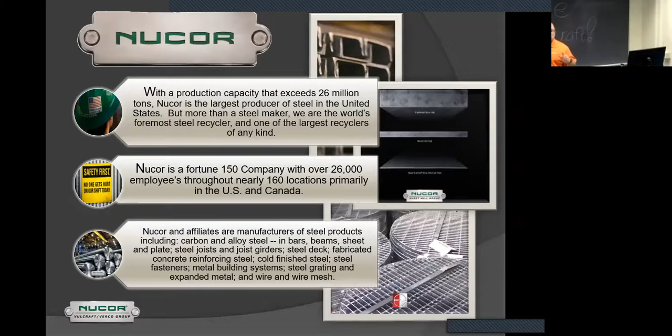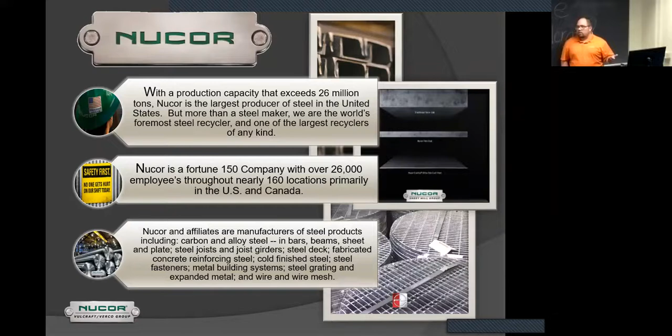And one of the neat things about being the largest steel producer in the United States, when they were trying to figure out how to do it more sustainably and have a better process, because steel companies in general have a bad rap, it gave them the opportunity to also be the largest recycler in the United States. So we're actually the largest recycler as well as the largest steel manufacturer in the United States.

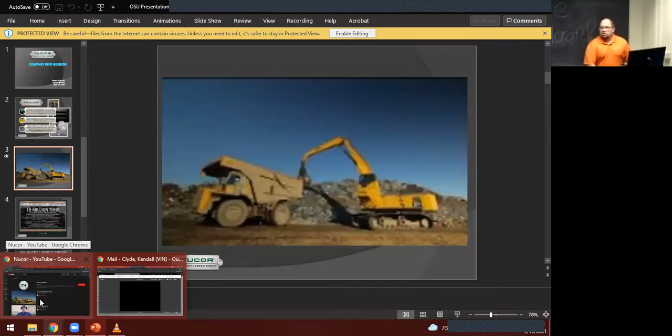So this is a video that doesn't work. So we're going to exit and I'm going to show it to you. But this kind of gives you a general history of Nucor, where they started. It's kind of neat, shows you some of the steel processes, how they make the steel. I promise it's not 12 minutes long. They have a bunch of dead space at the end of the video, as someone pointed out in the comments as I was watching this. Is that cool if I put the front lights on? Yeah, does it work like that?

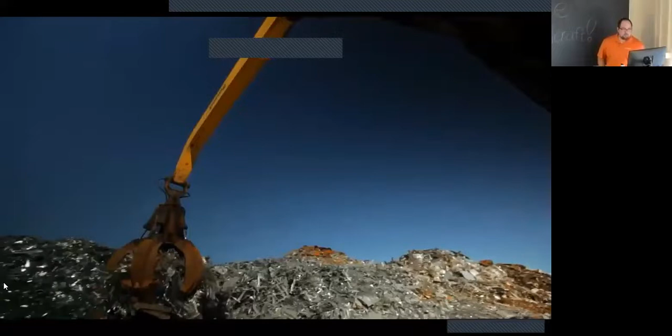It starts here. And ends up here. It starts here. And ends up here.

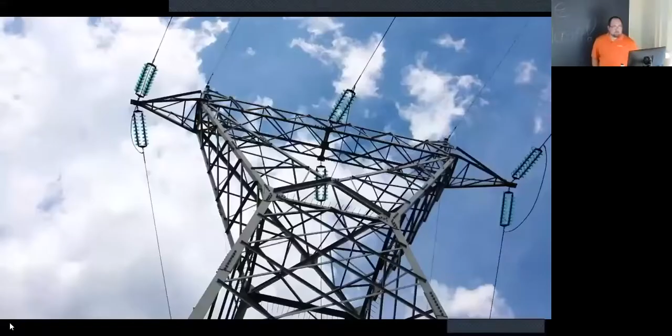Steel. It is everywhere in our modern world, providing strength today and ensuring an even stronger tomorrow. And it's made throughout the United States at Nucor's steel recycling facilities.

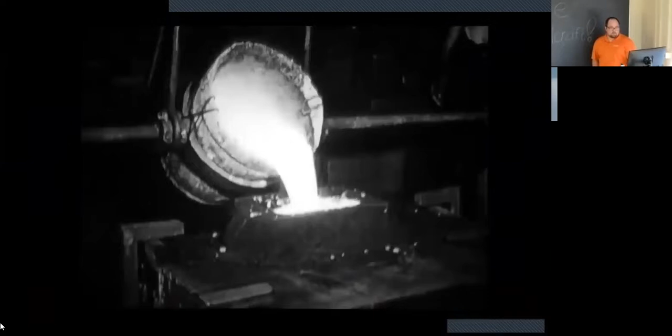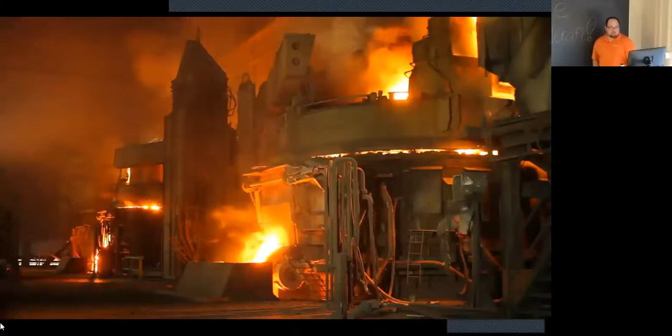Before the modern era, steel was primarily produced in blast furnaces that use iron ore, mined from the earth, as the primary feedstock. But starting in 1969, Nucor began producing steel using electric arc furnaces to melt down scrap steel and recycle it into new steel. This new generation of steel mill was called the mini mill.

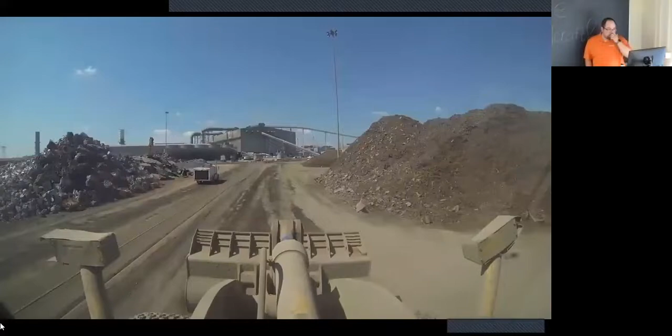No matter the process, making steel is about achieving proper chemistries, and Nucor pursued a more efficient way to achieve those chemistries by recycling the abundant scrap that was piling up in our nation's landfills.

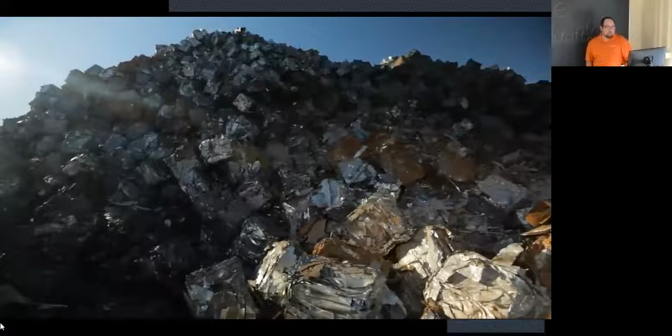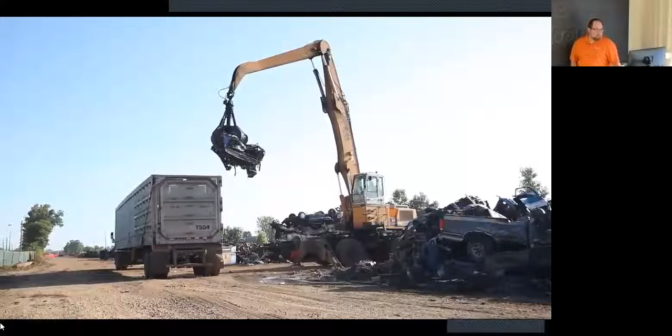Recycling steel using the mini mill model has allowed Nucor to become the largest steelmaker in North America, recycling more than 20 million tons of scrap per year into new products, the equivalent of recycling 24 cars every minute of every day. Our unique teammate-centric culture, combined with aggressive growth and strategic acquisitions, has propelled us from a single mini mill in rural South Carolina to the forefront of American steelmaking.

Our acquisition of the David J. Joseph Company, the nation's oldest and largest scrap processor, ensures that we are able to control our raw material supply. And greenfield projects like our direct reduced iron facility in Louisiana mean that we will continue to expand our product offerings and better serve our customers.

Nucor now operates more than 200 facilities across North America, offering a complete line of steel and steel products.

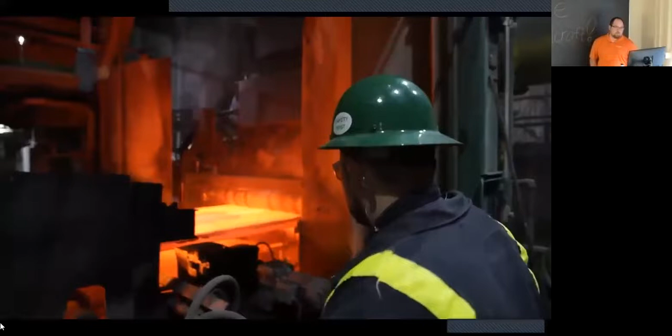Before making an ounce of steel, our more than 23,000 teammates start every shift with a safety meeting. Our motto is safety first, and it guides everything we do from start to finish. In the mill, our teammates are focused on taking care of our customers by producing and delivering top quality steel on time, every time. Here's how we do it.

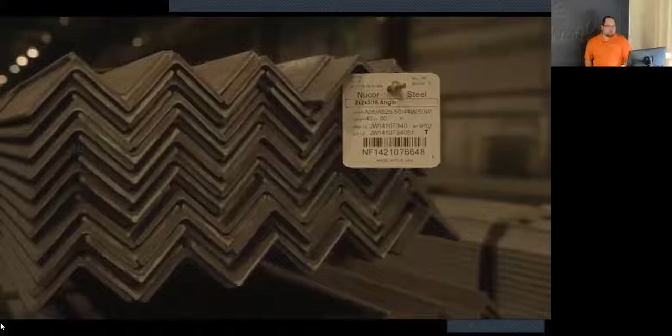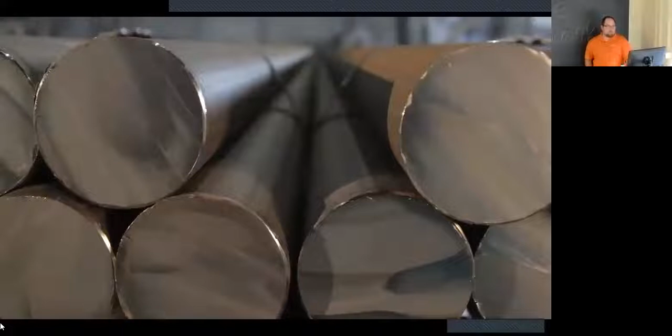Our advanced steel recycling process produces a variety of steel products, including bar, sheet, plate, and SBQ, but they all start in the same place, the scrapyard. In the scrapyard, we sort scrap for recycling. Because different types of scrap have different properties, we carefully combine our scrap so it will recycle into steel matching our customers' specifications.

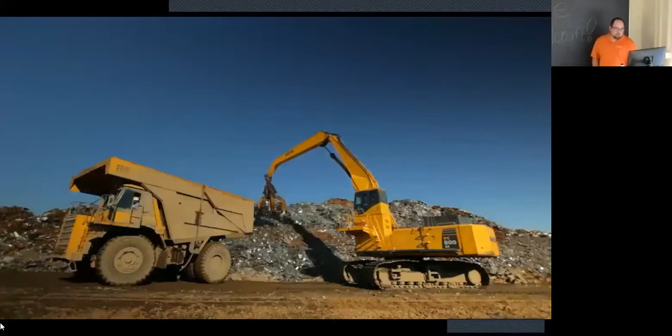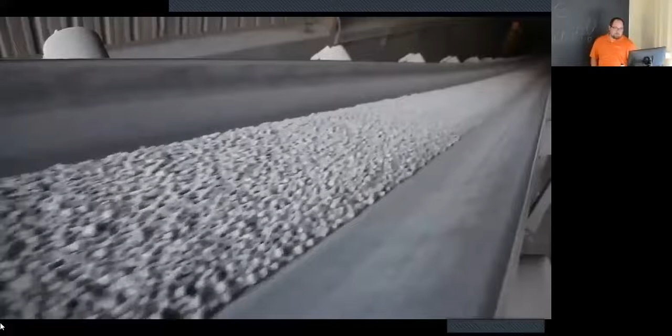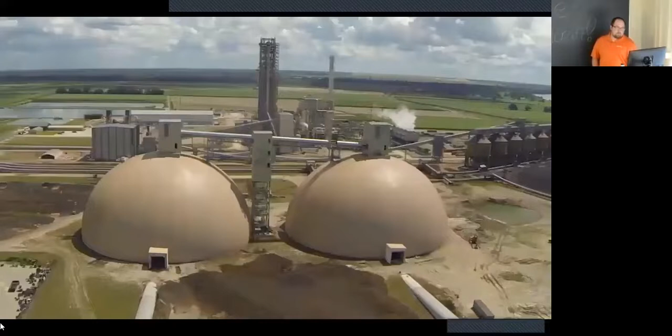Depending on a customer's specific needs, we sometimes combine our scrap with direct reduced iron, or DRI. Adding DRI allows us to produce more advanced steel products, including our high-strength, lightweight, and special bar quality products. And because our DRI is produced using natural gas, Nucor is making the most environmentally friendly steel on the market.

But recycling scrap is only part of Nucor's environmental stewardship. Our mills have extensive environmental programs for both their steelmaking process and the local environment, all designed to ensure that our process is clean and safe.

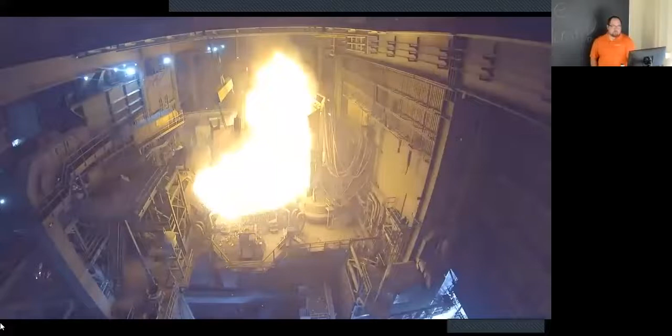Once sorted, our cranes drop the scrap into our EAF furnaces, which are the driving force behind our steelmaking process. The EAF uses electricity to melt the scrap down to 3,000 degree Fahrenheit molten steel. This process is significantly more energy efficient than traditional steel furnaces.

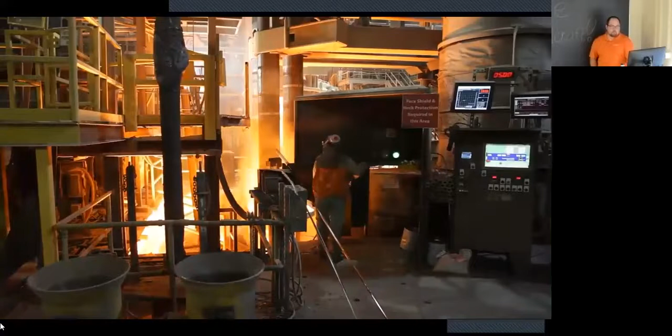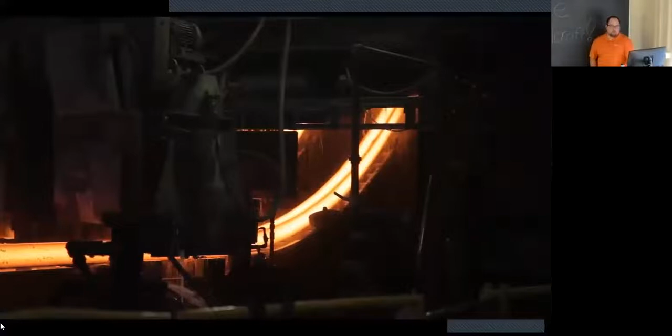Once melted, the steel's chemistry is refined with various inputs before moving to the caster. At the caster, liquid steel is poured down through molds and cools into long strands as it moves downward. These strands, usually called billets, slabs, or blooms, are trimmed in preparation for rolling and are the first time our steel starts to look like a product.

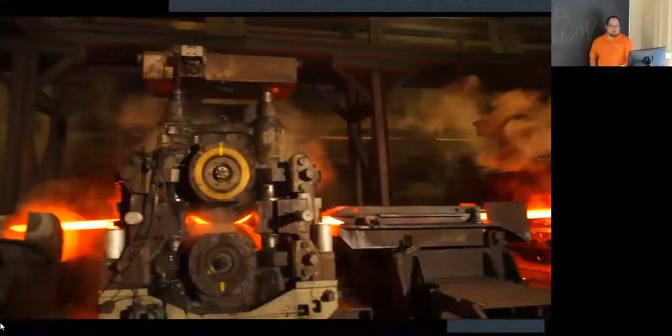The next step in the steelmaking process takes place in the roll mill. Take, for example, a steel slab in a steel sheet mill. Prior to rolling, slabs are heated to approximately 2,200 degrees Fahrenheit, a temperature at which they are malleable. Then they move on to the rolling mill stands.

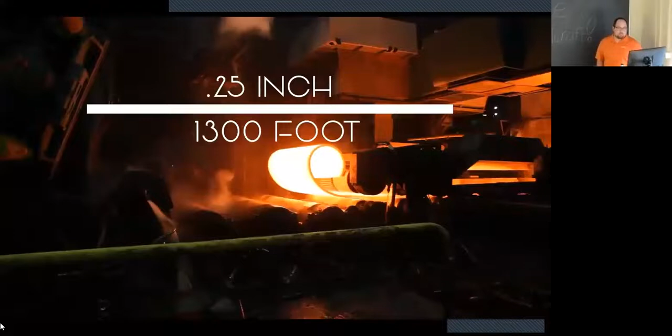To reduce a steel slab into a final product requires pressure, a lot of it. As a slab's thickness gets reduced through our rolling mill, thousands of pounds of pressure are applied to each mill stand at speeds of up to 2,000 feet per minute. For example, a 3.5-inch thick, 100-foot-long slab can be transformed into a 1/4-inch thick, 1,300-foot-long coiled sheet in a matter of minutes.

After the rolling mill, our products may be treated or finished depending on the final product. This includes pickling, galvanizing, annealing, and a variety of other treatments. Once finished, our steel products are packaged and shipped via barge, rail, and truck to customers across North America.

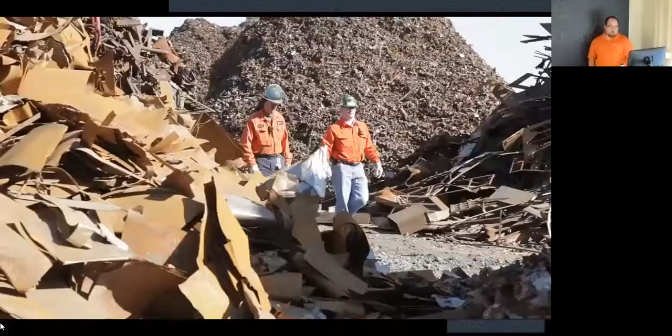At Nucor, our goal is to take care of our customers, take care of our teammates, and take care of the communities where we live and work. We are doing this while making the best steel in the world for the most important projects in the world, the buildings you work in, the bridges you drive across, and the car that gets you where you're going. Because as an American manufacturer, we live here too, and we know that at the end of the day, the most important thing is getting home safe to the ones you love.

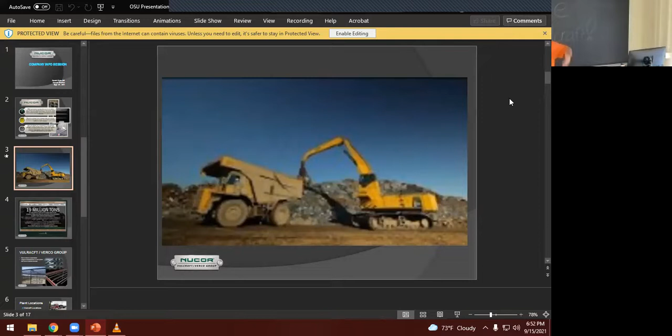Depending on the facility, someone has to take the temperature of the steel. Some of the older facilities have a guy physically out there putting a big old stick in to test the temperature and pull it out, wearing a big metal suit. It's quite the process. So if you ever get a chance, I highly recommend it.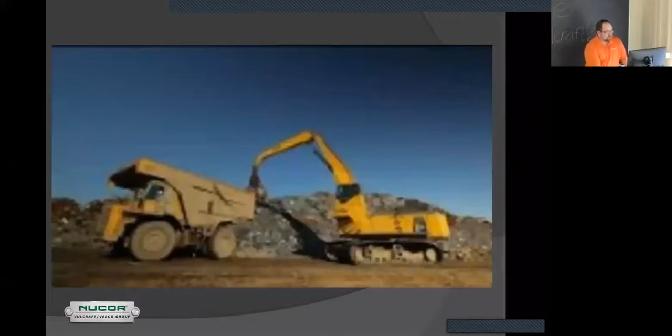Another interesting fun fact about the coils they showed — did you see the truck driving away with one? There was just one on the truck. I remember thinking, why did they only load one? That seems fairly inefficient, but each coil is close to 50 tons, so about 100,000 pounds. They put one on because the truck can only handle that much weight. So if it looks funny, or you see them wrapped and tarped up, it just looks like a big lump in the middle — that's a steel coil, and it probably came from one of our Nucor facilities.

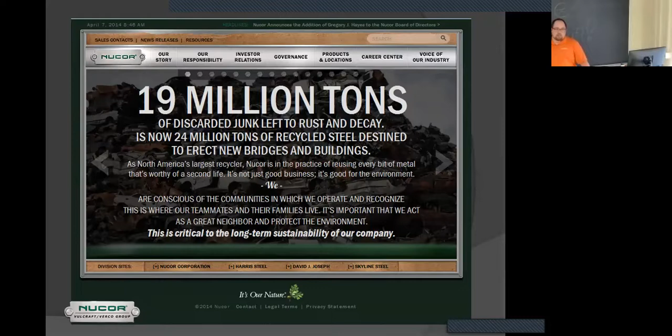Continuing on, sustainability is something we focus heavily on. As they talked about in the video, we recycle the heck out of steel, and it's one of the best products to recycle because it basically has an infinite lifespan. You lose a little bit when it rusts, but not enough to matter, so it can be continually recycled.

So that leads us into the Vulcraft Verco group — that's who myself and Kenneth work for. We're a subcompany of Nucor, and we take the steel Nucor makes and produce steel joists and deck from it. Want to chat a little bit about it?

Yeah, we have a video coming up here in a bit, but basically we take angles from the steel mill and run them through our shop. We lay down what they call the top chord and the bottom chord — essentially just two angles together — and in between them we lay the webbing. All the members that make up the triangles are angle as well; we crimp the ends of them until they're an inch thick, and put those between all the angles to make the joist. That's kind of what we do — we're the largest manufacturer of steel joists in the United States.

There is a governing body similar to, yeah, I guess... like AISC, the American Institute of Steel Construction.

There's the steel manual that you have from AISC, and we also have a group called SJI, the Steel Joist Institute. They have codes that we have to follow, similar to ASCE 7-10. All those codes apply.

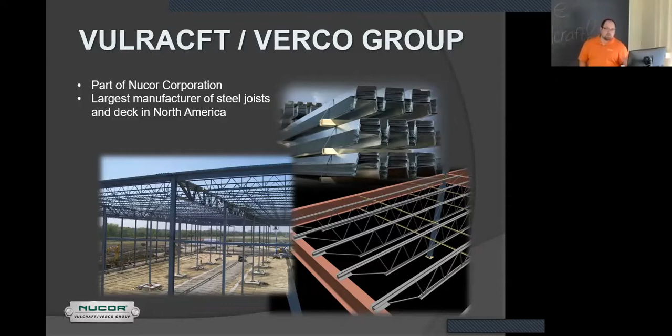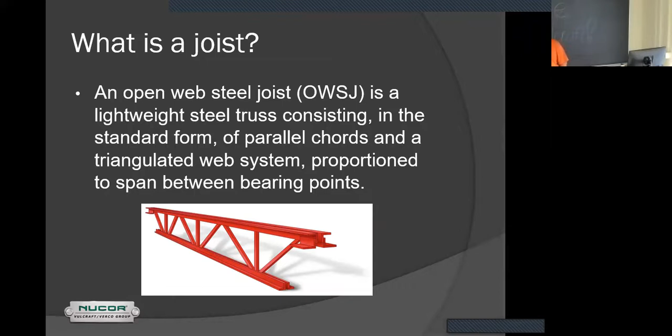Kenneth was explaining this a bit, but this is a joist in layman's terms. Typically, when you think of joist, you probably think of wood joists on a floor like in a house, but this is a steel joist. It's got an open web concept where your top and bottom chords carry all of the moment, and the web members carry all of the shear. That makes it very optimal in a lot of building situations because you have those openings to run stuff through.

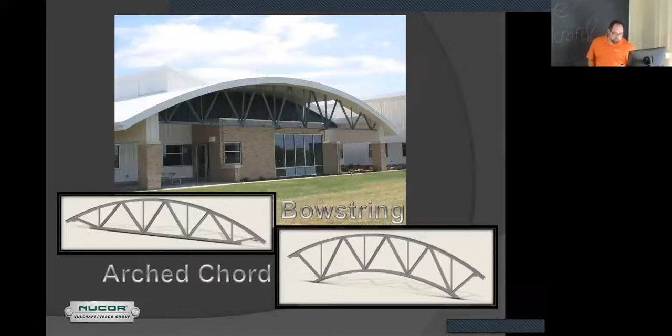Here's a couple examples of different types of joists. We can do all sorts of shapes and sizes. You've got an arched chord joist there on the left, and a bowstring joist on the left and an arched chord on the right. We can also do what are called double pitched joists, to make a hip and gable roof essentially, and then scissored, which is the image above.

This is a football practice facility at, I can't remember what university, but they needed those scissored trusses so that when they're kicking or punting the football, they've got that open space.

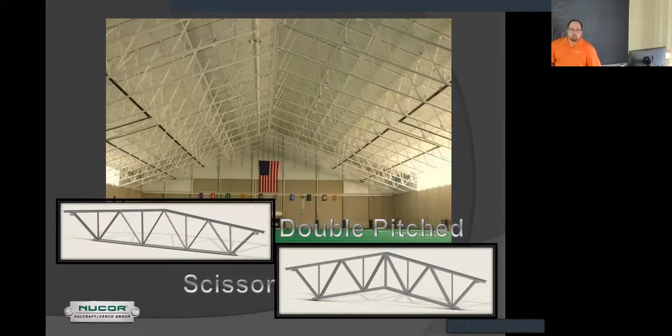So that leads us into our deck products. We also produce deck, so corrugated metal, typically used in roofing, as well as composite floor systems where you'll have like a composite deck with concrete.

Have any of you guys taken a concrete class yet? Do you guys ever go over composite design? No? Well, be grateful.

Lots of extra steps, but so you've got roof decks, you've got a standard deck and an acoustical deck. This top one here would be a standard deck. The acoustical deck, and this isn't the greatest image, but it's got fiberglass fill that goes into them, and they have holes drilled into them. So if you were in an auditorium or something, it dampens the sound.

Essentially, what the deck does too is the joists on their own, if you were to lay them sideways, are very flimsy—the out of plane, lateral stiffness is not there. So when you have them erected and you put the deck on top of them, you're tying them together and giving them that lateral stability so they can't just bend out of plane. So the joist and the deck together make up the roof structure, or the diaphragm, of the building.

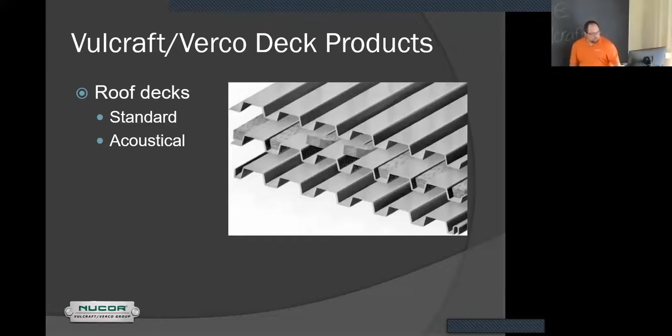We also produce floor deck, which I was talking about. There's a composite and a non-composite version. The composite deck here gets rolled with embossments so that it can bond to the concrete, so you get that action. It allows you to use the steel as the tension member on the bottom, and then use the compression of the concrete on top.

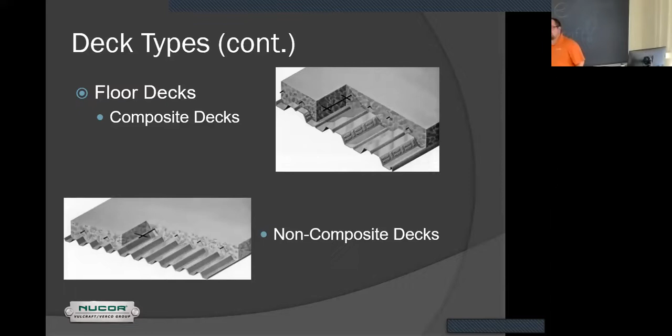We also produce non-composite deck, which is essentially no different than a piece of plywood holding the concrete up until it cures. But it does it a lot better than a piece of plywood—you can span larger spans and whatnot.

And then last but not least, we have cellular decks, which is just a fancy deck for architects that want stuff to look pretty. Essentially it's our deck, and then they slap a piece of sheet plate to the bottom of it so that it's a flat surface. You can also get those in acoustical, as composite, so it can be floors, it can be roofs, it can be all of the above.

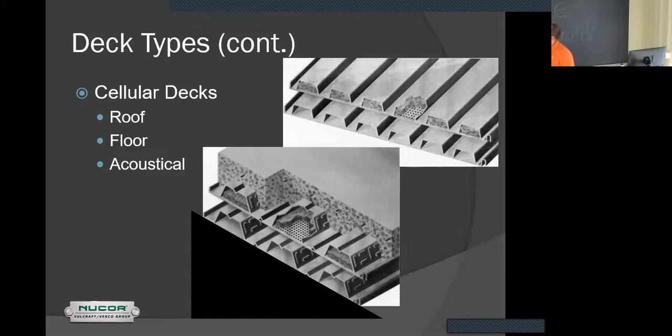All right, so here's the other video. This video is going to show our process. This is actually shot at our plant. You'll kind of see the guys welding up joists, doing all that kind of stuff.

And once we do that—how much time do we have? 15 minutes, just about schedule. Perfect, we're not going to go over that, I promise. You guys have any questions so far? Anything? I have a quick question.

So, all materials are made out of recyclable steel? I mean, all materials are recyclable, or do you ever do new products, like steel from ore out of the mountain and melt it down? No, nope. And I think I've got a slide that has the percentage of what Vulcraft uses. But as far as Nucor goes, it's like 95% recycled material.

They just have additives in there, right? So they'll put lime in, they'll put different additives like the DRI they were talking about, direct reduced iron, a few other additives to make, say, 50 KSI steel versus 80 KSI steel, or to get the different properties, whether it's A992 or whatever type of steel they're trying to produce—they'll add different additives in there.

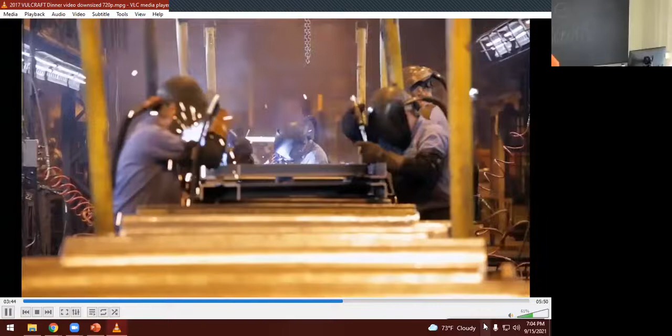Might skip forward here just a little bit, but we've seen enough producing.

So once it's all built, it'll get inspected by an inspector. They'll check the welds, they check the member sizes, the thicknesses, and all that stuff. And then it actually gets sent to our paint tank, where they dip it in our primer to get sent out.

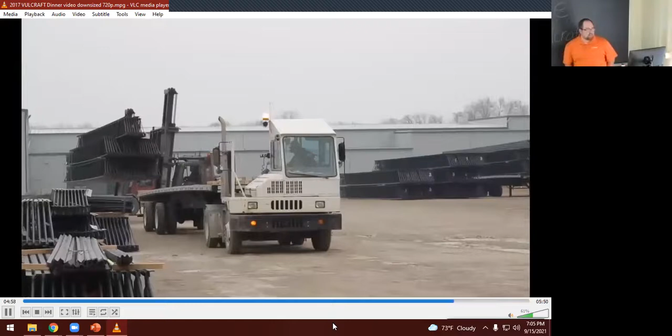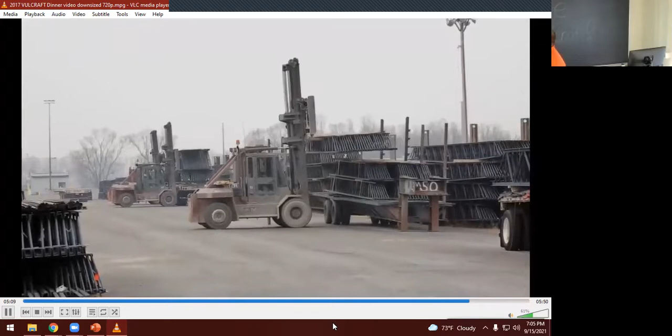So right there, he's craning it out of the paint tank. And then obviously once it's done, it gets stacked in our yard. We have some very skilled forklift drivers that go around and stack the goods, bundle them together. And then essentially they get put back on a truck and get shipped to the job site.

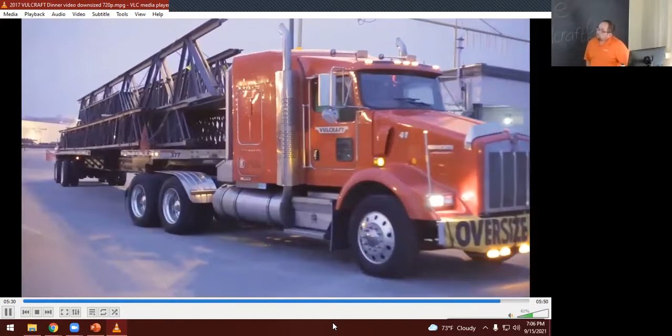Yes. How far do they have to travel to deliver it? Great question, so I'll go back to this real quick. All right, so these are all our locations, right? So each plant has a geographical region that they service a customer in.

So for Indiana, it's basically Illinois, Indiana, Ohio, and Michigan, and a little bit of Kentucky. For New York, they cover Pennsylvania, a little bit of West Virginia, basically the whole Northeast. South Carolina covers here, you've got Alabama that covers here, so on and so forth. So it really depends. You got Texas—they actually cover parts of New Mexico as well as up into Oklahoma, and it's a lot further. For our plant specifically, the farthest they're going is about 5-6 hours one way.

So not very far. But then also you look at Utah—Utah covers Seattle, Washington, which is, call it 9, 10, 12 hours in one direction, or going down to Southern California, you're looking at 12 hours as well. So that's one advantage for our plant specifically too, is our freight costs are low because they're not having to drive as far.

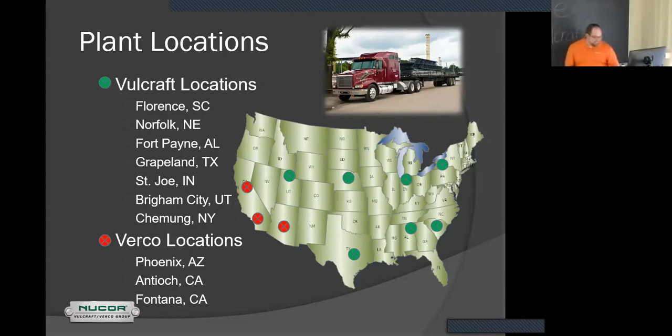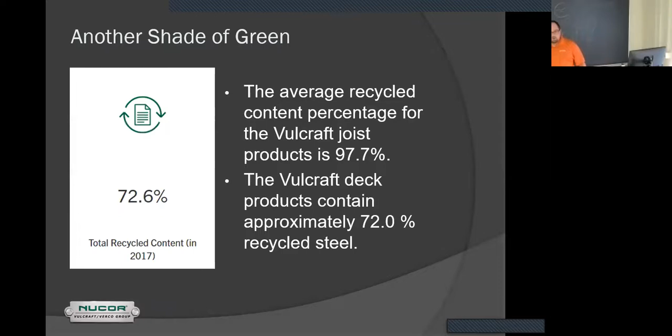My role includes designing the joist, running it through our proprietary design software, making sure all the loads are covered, and making sure there's no issues with loading configurations or anything like that.

As a design engineer, you're also helping out the detailing department. A job will come in, and our detailing department will take the customer's drawings, the contract drawings, and draw in all of our product, then detail it into a three-dimensional model. When there's loading questions during the approval stage, they'll come to engineering, where you may need to contact the engineer of record for the project to see exactly what they were looking for. That's most of our responsibilities.

Some of it would be doing repairs for joists. Sometimes they'll design a joist for one loading scenario, and then down the road they want to move something on the roof. They'll contact us and say, hey, you've got this joist, we want to put a point load here, what do we have to do to accommodate that load? So we'll go through our design software and come up with a repair solution, so in the field they can install some extra angles, some extra rod, or throw some extra weld here or there. That's another big part of what we do. That's the only other big thing.

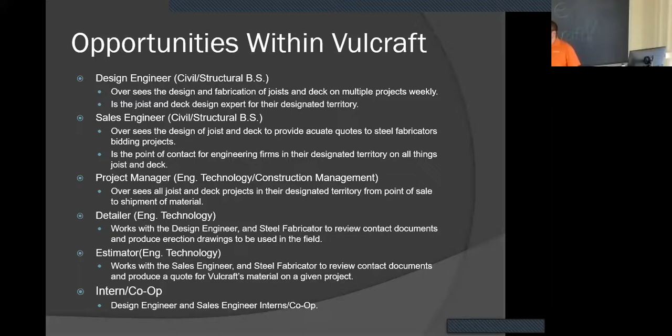And that's part of our culture, so we really try to cultivate that. We focus hugely on safety and family and whatnot, so it's just something we are trying to push forward. So with all that, is there any questions that anyone has?

I have a funny question. Yeah, they mentioned something right at the end of that first video, talking about like annealing or anodizing, but they mentioned pickling. Do you know what that is?

I knew someone was going to ask that because I don't know. We've heard it thrown around - they call it the pickling plant. I believe it's a chemical treatment to the sheet. Those coils, you can get them in what I think they call black, which I believe is the pickling process, so it won't rust, but it's not galvanized. So it won't rust for a period of time, similar to... I don't know how to explain it, but something similar to that.

What I will do is I will look it up and I'll shoot you an email. Because it's funny - I watched the video a couple times this past week as I was putting it together, and I thought, man, someone's gonna ask me about pickling. I need to look that up. I just thought about it when they said it - it goes by so fast too.

But yeah, any questions on the design engineer role or sales engineer role or comments, concerns, complaints?

So do you work out of the Springfield plant then, or where do you work out of? Yes, so I specifically work out of our Springfield sales office. It's about 40 minutes west of here, 45 depending on the day. Our Springfield office is an outside sales office, so it's fairly small - it only consists of 7 employees currently. There's myself, a sales rep, a district sales manager, a project manager, and we have 2 detailers.